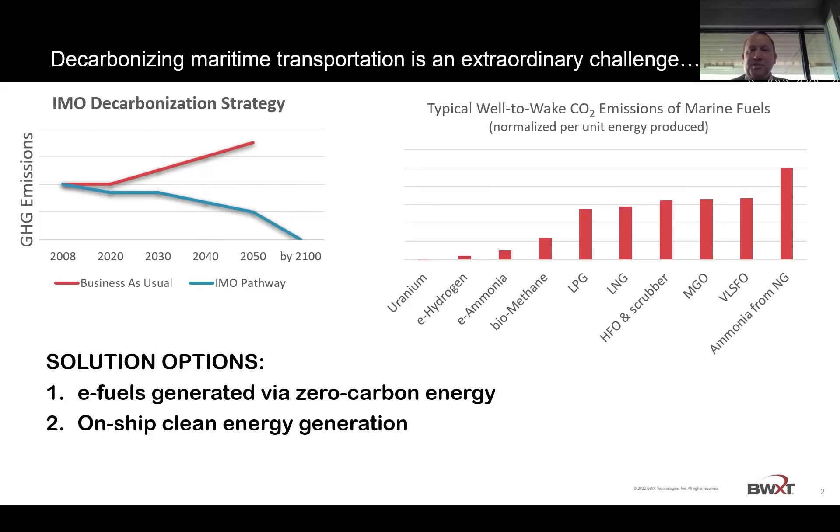But I was curious, could you in fact do that? And as I did some research, I really could only identify a couple of ways to actually achieve 100% decarbonization of maritime shipping, certainly if you're looking at the very large ships. And that would be using e-fuels, and that really only counts if you're generating them with zero carbon energy. So people tend to assume renewable energy for that. Or if you could generate energy on ship in an emissions-free manner. So with that, I kind of look at those two options in a little bit more detail.

So on the left, I've got the idea of producing e-fuels using nuclear energy. And the reason I say nuclear energy is it's far and away the largest emissions-free source of energy that exists. When we're talking about e-fuels, you consider that there's a considerable amount of energy lost in the creation and transportation and eventual combustion of those fuels. And the volumes of e-fuels that we're talking about for some of these large ships, if you run the numbers, and I have, you cannot realistically generate that level of hydrogen or ammonia with renewable energy. It simply doesn't have a sufficient power density to do that. Really, the only way to do it is with nuclear energy.

Another thing to consider, another potential drawback, if you look at this figure on the left, I've drawn essentially equivalent fuel volumes, depending on what type of fuel you're using for your vessel. And you can see that if you go to something like hydrogen or ammonia, it takes more than twice the space of current fuels to get the same amount of energy out of it. You'll also see, I did this kind of tongue-in-cheek, that you can't see anything at all for uranium. The reason is that uranium has an energy density of more than 1 million times fossil fuels. And so you literally would not see on this plot, in comparison to these tanks of fuel, the volume of uranium needed for the same amount of energy.

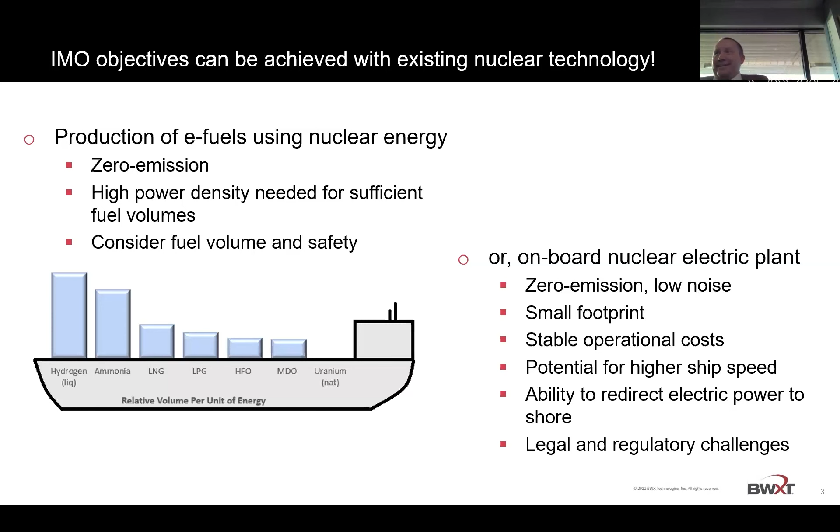With the ports, one of the interesting things I didn't hear come up during this conference was that they want to electrify, but a lot of these ports are in places that simply don't have the grid to support electrifying. And so nuclear-powered vessels are a very interesting potential solution to that. Now, of course, there are legal and regulatory challenges. There are reasons why we don't already have all of these nuclear ships out there, and I'll get into that a little bit as well.

BWXT, just a little bit of information because a lot of people have not heard of us, and that's for good reason. For a long time, the only thing we did was manufacture U.S. naval reactors, and so there wasn't much reason to have a social media presence. And that is our primary business, and that is still our main business. But we have gotten into microreactors, space reactors, and I'll show some examples of that in more recent times.

But the main thing I want to point out is actually not on this slide specifically, but we have over the time of our existence manufactured over 400 nuclear reactors. A lot of people don't realize that there have been that many made. That's probably more than half of the reactors that have ever been constructed. Of course, mostly for the U.S. Navy over its history.

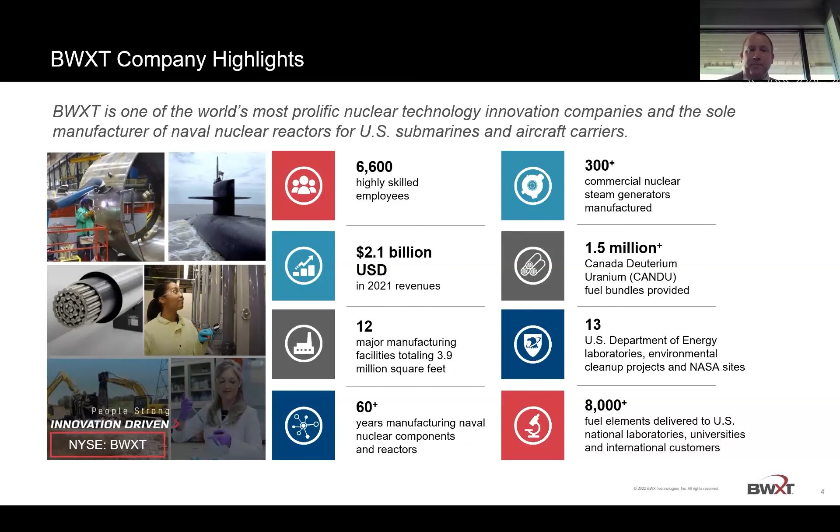We as a company have been around with one name or another for over 165 years now. You may have heard of Babcock and Wilcox or B&W. The name has changed a few times, but it's the same company. One thing I'll have to put on a later iteration of the slide is that you heard about the NS Savannah yesterday. B&W manufactured the reactor that was on the NS Savannah. So something we've been doing for a long time.

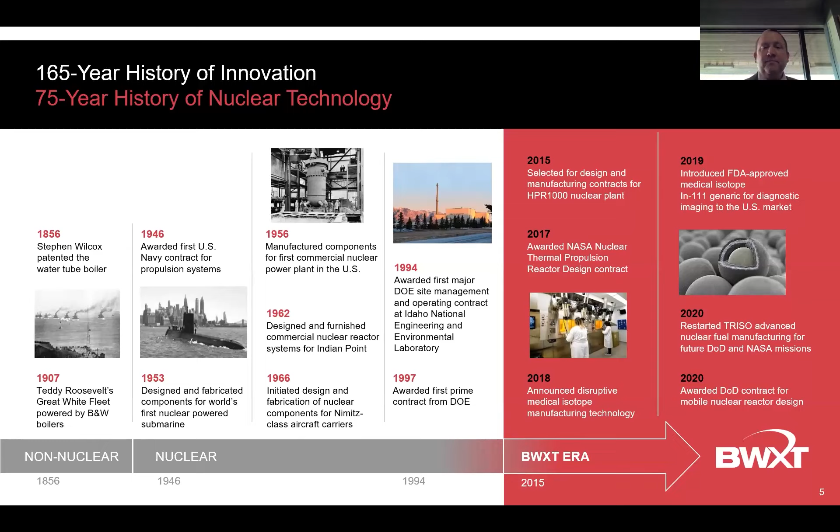So what are we doing in our advanced technologies group today? When I talk about advanced technologies, which is the group that I'm in, that is everything that is not naval reactors. So we are distinct and independent from the naval reactors program because we have commitments there that we don't want to worry about impacting. So some of the projects we have going on, which you may or may not have heard of, one of them is Project Pele. This is for the Department of Defense.

This is a 1 to 5 megawatt electric reactor, and we're not allowed to say much more than that because there are some classification restrictions around this. But the important thing to point out about it is this is a microreactor that is currently under construction. So when you may hear people say, well, advanced nuclear is a great idea, but it's too far off, it's not a true statement. We're building this reactor right now. In fact, you can see a picture of one of the vessel heads being forged right there.

The other interesting thing about this concept is that it needs to be small enough and light enough to be transported wherever the Department of Defense wants to use it. And so it actually fits inside a 20-foot Connex box and can be shipped by Air Force cargo plane. So it's very challenging because making a nuclear reactor of the power level we want in that size and mass is not an easy thing to do, but it certainly shows some of the capabilities.

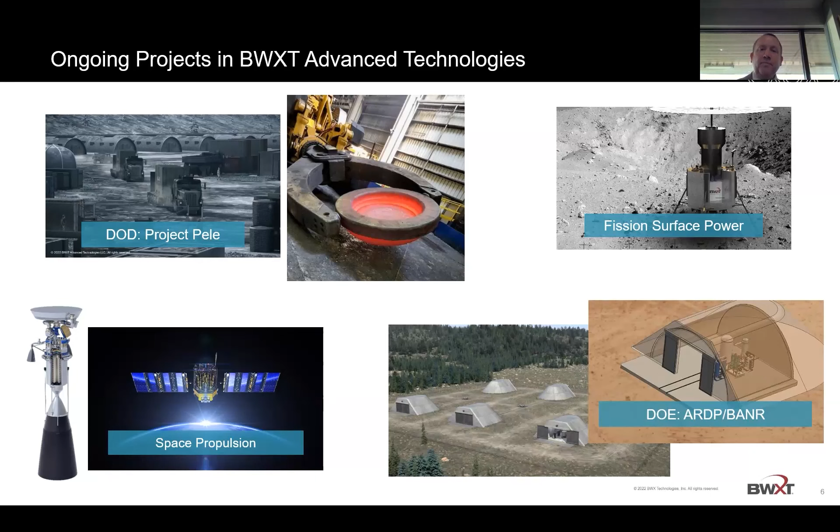This won't be new to a lot of folks in the room here. Marine nuclear, civilian marine nuclear, is not a new concept. We heard about the Savannah yesterday. 60 years ago, we had already put a commercial nuclear-powered ship on the sea. It's definitely a point of frustration in the nuclear industry that we've gone that long, seemingly having come up with a solution for emissions-free shipping.

The ship, the Savannah, really was a success story. It did what it was supposed to do. It was never meant to be an economic demonstration, and so in fact, it was not economic, and that was one of the big reasons why it didn't spawn a whole generation of nuclear commercial vessels. It was just a little bit too expensive to operate in a time when the alternatives were pretty cheap.

And so I often wonder why, in 60 years, we haven't gone back. Certainly we've looked at it, but why have we not gone back to something like this? I don't know that this is the case, but I think it's probably that we just haven't really had to make the decision to look at nuclear more seriously, because we haven't been so worried about decarbonization in particular. That really, I would say, is the big thing that's changed in recent years.

Recently, we're seeing an enormous amount of interest. Oil companies, shipping companies, multiple a week are contacting us to ask about how this stuff would work.

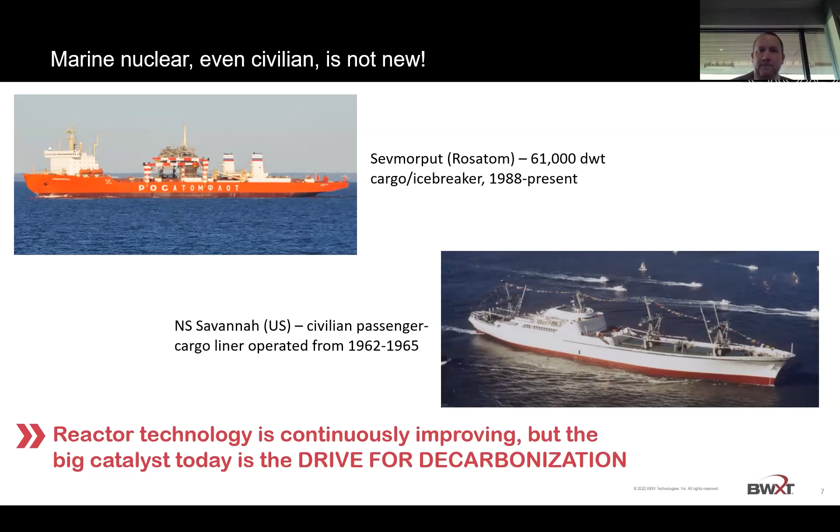So I didn't want to presume that folks knew what we're talking about when we're talking about nuclear power or nuclear propulsion. If you look at how nuclear propulsion works on the Savannah, this would be a typical pressurized water reactor in this example, with some sort of steam generator coupled to a typical Rankine cycle where the turbine is directly driving the propeller. I'll get into a little bit later that this is not likely what commercial vessels would look like, but this is kind of where we're starting from.

And this is also where all the experience is. The vast majority of vessels that are out there with nuclear reactors on them, military or otherwise, are pressurized water reactor type like this. That's where most of our experience is.

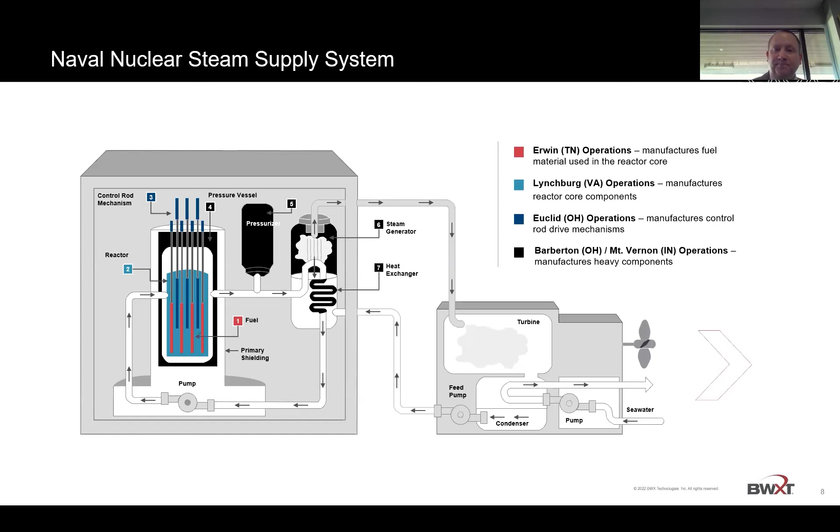So I put this slide in for Sergio specifically. He was at my last presentation and said, I really would like to see more on nuclear safety specifically. I'm like, okay, that's a fair question. So when we talk about nuclear safety, there's really a few different concepts here. One of them has to do with criticality.

Without getting into all the details of nuclear physics, the way nuclear energy works is you have neutrons out there. They're hitting uranium atoms, causing them to split and create energy. Part of the product of that reaction is more neutrons, and they cause more reactions. So you have this chain reaction of neutrons. The way you control a reactor is by making sure that the population of neutrons stays the same.

So you're generating more than one neutron with each fission, but you only want one of them to make it to the next fission, so it stays at the same power level. We call that criticality. The reactor is critical at that point. So with nuclear safety, one of the things you have to be able to prove is that you can shut down that nuclear reaction when you need to.

When there's any sort of potential accident, you know that you can shut the reactor down. Chernobyl is a good example of a case where that didn't happen. That had to do with the design of the reactor, and it's something that in the Western world we've had solved for quite a long time. Criticality is generally not an issue.

In fact, there has not been any sort of Chernobyl-style accident, because American reactors and any reactors you'll find in Europe have physical characteristics that make it impossible for them to go uncontrollably critical. The reason has to do with the temperature of the reactor. As the temperature heats up, the reaction moves in a direction of slowing itself down. So eventually, with enough increase in heat, it simply can't sustain itself. So that's the criticality side.

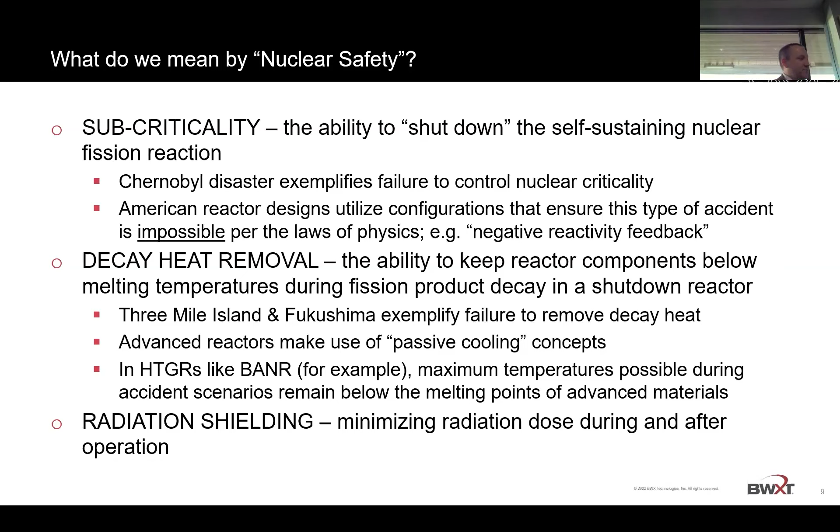And the reactor itself is so well shielded that sailors actually get less dose than average members of the public. So you can be in relatively close proximity to a reactor, certainly within tens of meters, for a long period of time and not receive an appreciable dose.

When you look into advanced nuclear reactors, you quickly find that there are a lot of technologies out there, and a lot of people have their favorites. There's a lot of startup companies looking at different ones. I like to clarify that we're on a spectrum of maturity here when we talk about reactors. Like I said before, light water reactors, so PWRs, BWRs, are far and away the most mature technology we've got out there. They don't have some of the neat features that the new ones will have, but they have certainly in the maritime space proven themselves out for a long time.

I toss in high temperature gas reactors as mature technology. There's a number of those in operation, research reactors. The UK in particular has a great deal of experience for decades on high temperature gas reactors. Lately, molten salts have been the hot topic, although this is by no means an all-inclusive list of technologies. But molten salt gets a lot of attention now, a lot of research going on there. People like them because they have some benefits in terms of refueling, continuous refueling, a lot of good safety features. They are probably 5 to 10 years behind where we want to be on a lot of this.

If we look at some of these IMO targets, we've had experiments, and we've had molten salt reactors. I didn't want to get too much into the details on this, but the molten salt reactors they're talking about now have the fuel as part of the salt. That's a relatively new concept. Molten salt, where the salt is simply a coolant, that has been around a little bit.

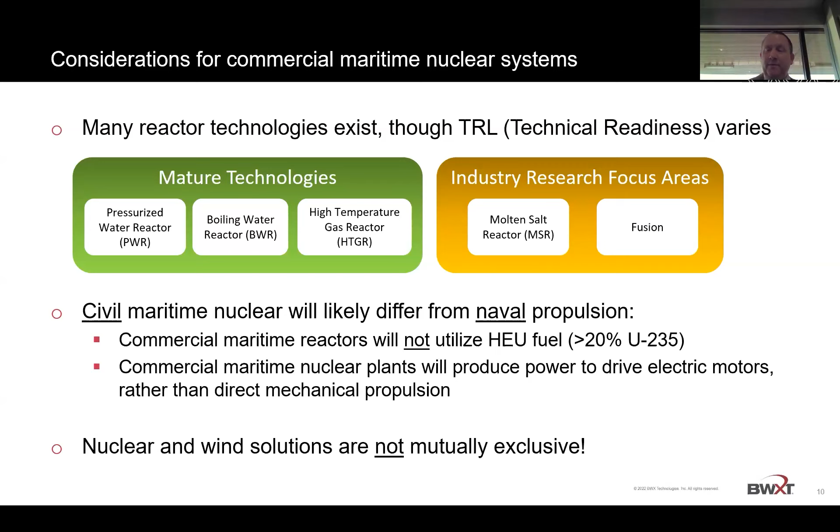This is just kind of a quick thing to show that we've gotten so much interest from industry on how would this work? What's the next step to get a commercial reactor on the ship? And so we've started doing a lot of these systems architecture type workshops, and I've taken the results of one and gotten all the proprietary stuff out, kind of simplified it a bit.

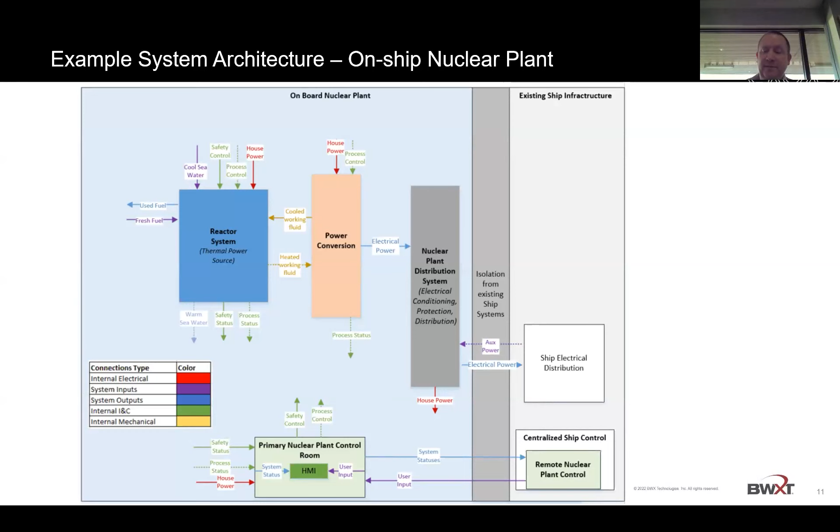But the idea is to show that we're already working with companies on how the reactor as a system and its power conversion system and its power distribution would work within the types of vessels that we're talking about putting these in. Where would the boundaries be? A lot of the questions out there are where do the nuclear regulations stop and marine regulations take over? Where do they overlap? We're looking with a number of different end customers on how that might work.

Virtually all the concepts are turbine type. Yeah, and it's because that technology is reliable now and lower cost. A lot of the direct solid state conversion stuff simply doesn't have the efficiencies to make it work well. For things like space applications, there may be a use for it. Yes, in fact, a lot of historical space reactors did use that.

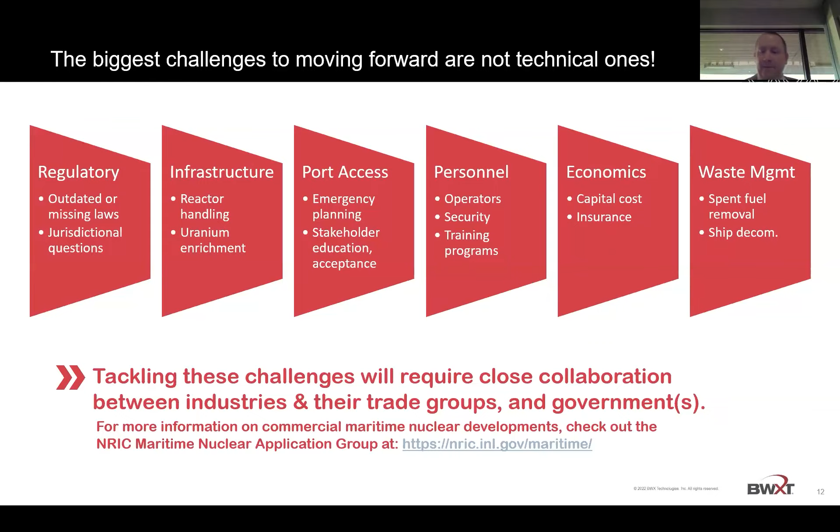So I will take any questions about